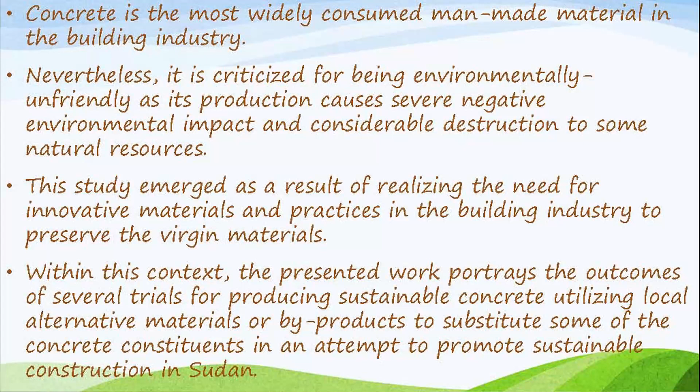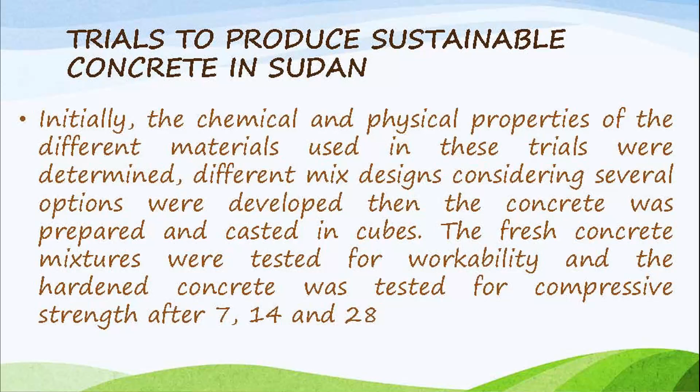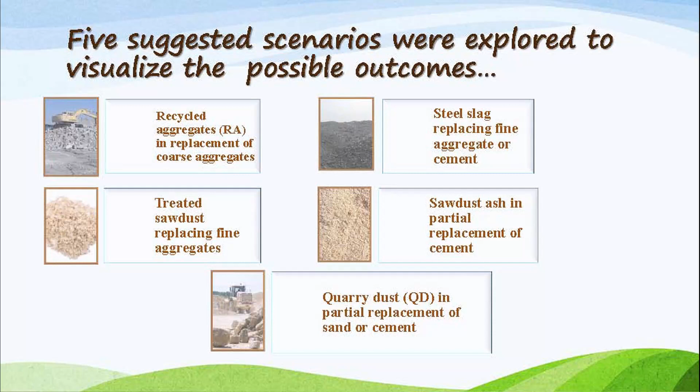In our scientific research, we have a lot of trials - about 9 trials, but now we have results for 5 trials. We need to find how these trials affect the behavior of concrete, like workability, compressive strength, durability - what happens if we add some of this material to concrete, to the workability test, or to the compressive strength test. We have 5 suggested scenarios we explore for possible outcomes. This is from the literature review of materials we found in Sudan - these are the 5 suggested scenarios.

We'll talk about one scenario and the results for each scenario. Scenario number 1 involves 100% recycled aggregate and natural pozzolan as a replacement of the coarse aggregate and cement in the concrete mix. In Sudan, there is a lot of demolition of buildings. In this scenario, we need to find whether adding some of this recycled aggregate and some natural pozzolan from Jabal Marra or wherever can increase compressive strength or increase workability, or decrease it, or whatever.

This is the scenario - the picture shows how we take the recycled aggregate for the trial. In this scenario, we have 8 trials. Each trial has cement, water, fine aggregate, natural aggregate, recycled aggregate, and pozzolan, and we found some results on the properties of the recycled aggregate and natural aggregate.

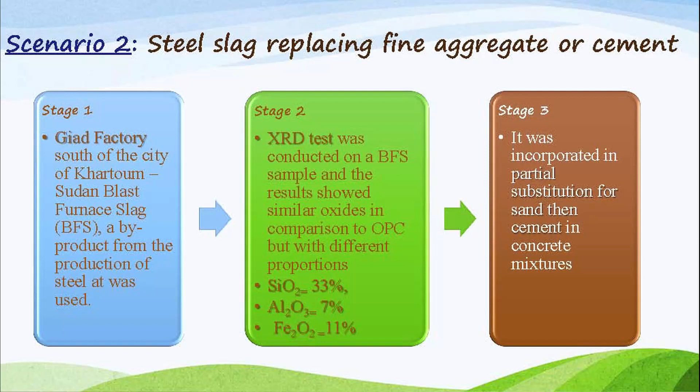Number 3, it was incorporated as partial substitution for sand and cement. A standard mix and other 3 were the slag replaced at 10%, 15%, and 20% of sand weight, and 15%, 25%, and 35% of the cement weight.

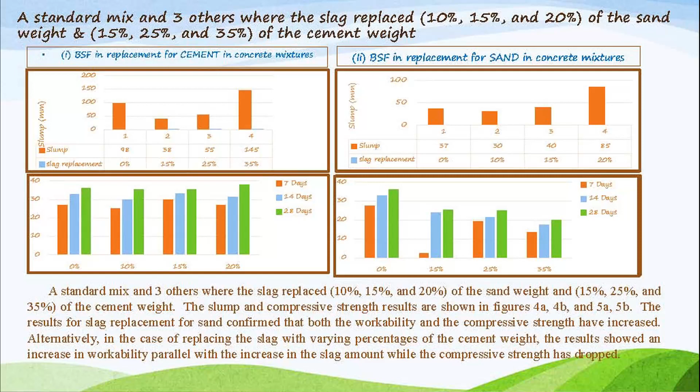Trial number 6, treatment with calcium hydroxide about 10%. And number 7, treatment of the sawdust changed to 20%.

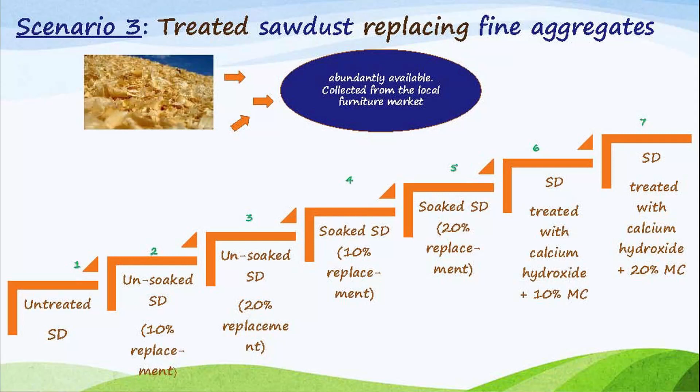The sample of sawdust was from the local furniture market in Khartoum state. Then we collected the treated sawdust and used it in the concrete mix for 7 cases. We conducted the compressive strength test for all 7 trials. We have some positive results for the treatment using sawdust replacement for fine aggregate.

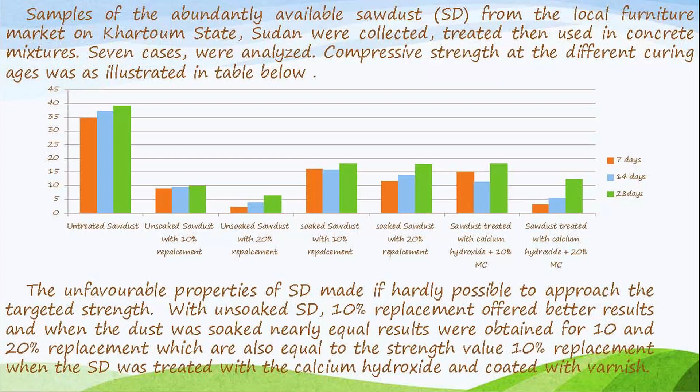Scenario number 4, sawdust as the partial replacement of cement. We collect the raw sawdust, burn some sawdust to ash, perform sieve analysis, and then prepare the sawdust concrete mix.

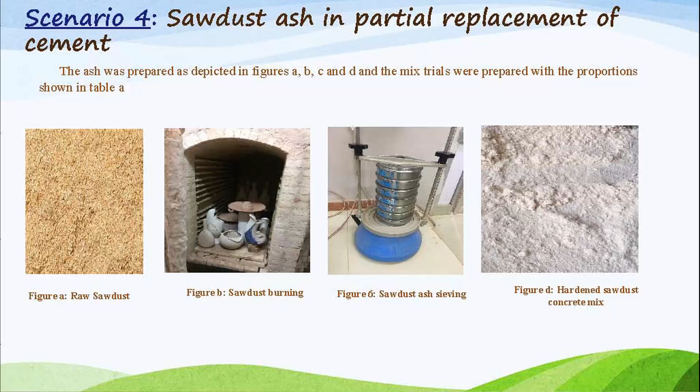This sawdust we use in the concrete. Then we do the compressive strength and slump tests for mix number 1 and mix number 2. If we look at the result, we find the compressive strength decreases for sawdust.

If using sawdust about 10%, then increasing the percentage of sawdust to about 20%, the workability or slump test of samples using sawdust decreases about 20%. Then if we increase the percentage of sawdust used as replacement of cement, the workability also decreases. Better results are achieved when the ash was used as replacement for cement.

Slump values are within the design limit of 30 to 60 millimeter, and compressive strength meets the target value within the 20% replacement ratio.

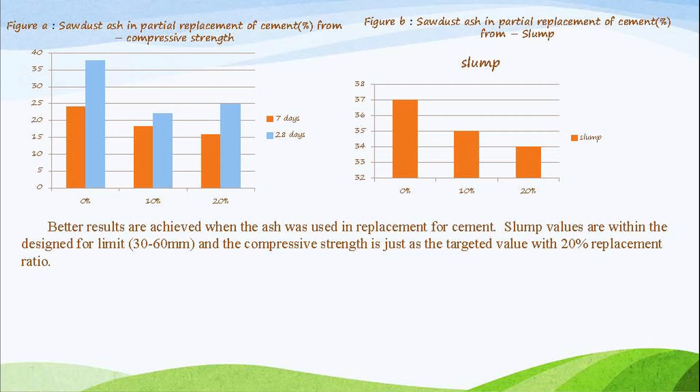Scenario number 5, quarry dust as the partial replacement of sand. Quarry dust is sediment produced from the process of extracting and treating rocks. This is collected from the manufacturing of cement, then used in the concrete mix.

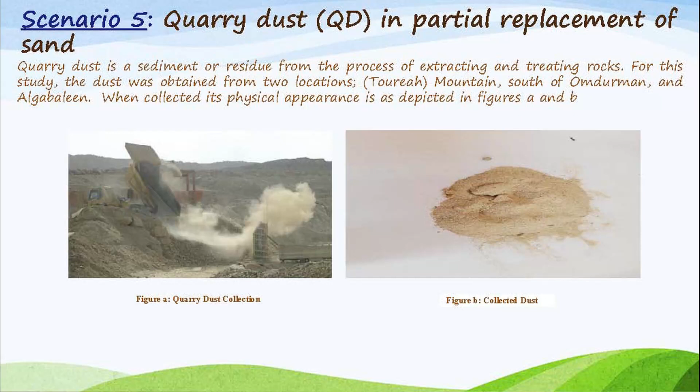Quarry dust from Omdurman, Sudan, and we have 2 locations. We collect the sample of quarry dust from Algabaleen, Sudan. We see the variables of the result for compressive strength.

In replacement for sand, concrete mix containing 15%, 25%, and 35% of QD replacing cement, and 15%, 25%, 50% were designed and prepared. Quarry dust's workability in fresh concrete was measured for all mixes, along with compressive strength.

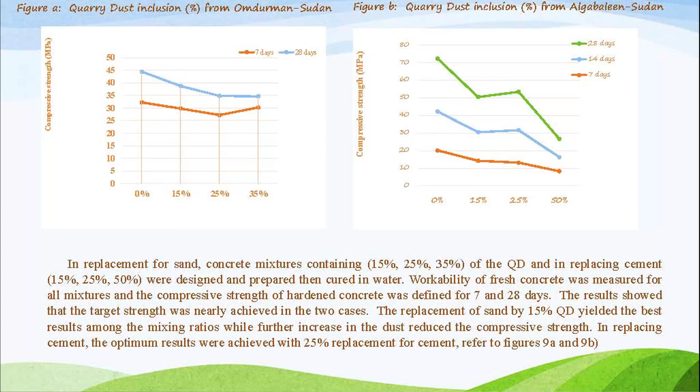The replacement of sand by 15% QD yielded the best result, and for the replacement of cement about 25%. The result confirms the suitability of recycled aggregate for full replacement of natural coarse aggregate.

Steel slag was more appropriate for replacing sand than cement when added in small percentages, not exceeding 15%. Sawdust needs treatment to eliminate its unfavourable properties. The addition of QD replacement of 15% of sand offered reasonable workability, but the compressive strength was only approaching the target value.

According to these results, it could be inferred that the test options offer reasonable evidence to confirm there is potential for producing green concrete for Sudan.

I am told we have more of these trials. We have about 8 trials, but this research focuses on 5 trials. My colleague, Dr. Salma, tomorrow we'll talk about 1 trial on metakaolin in Sudan, or kaolinite in Sudan. This is one of the biggest trials we do in our research.

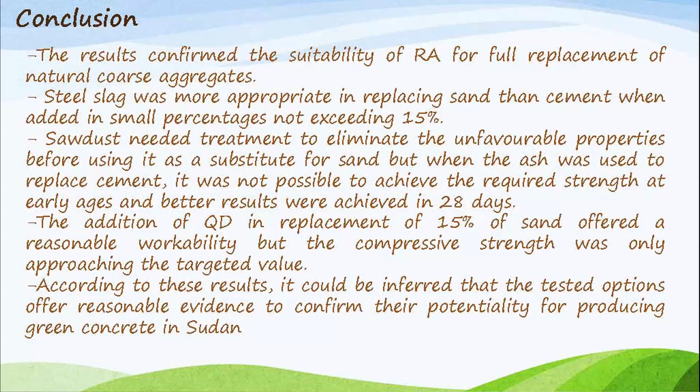We very much appreciate this, and we are grateful, and I can see that you are doing your very best, because we just received a message from Libya, from Professor Nasir, who has been for the last 2 to 3 days trying to find a single hour to fix his presentation. He couldn't, and he said now he can't join us because of electricity. And I think this really is the issue.

We have been discussing this quite seriously across lots of conferences in London and others. Africa's major developmental problem is electricity. This is being acknowledged by many people. When we talk about sustainable development in Africa, all people, myself included, argue that if we can't fix the energy, particularly electricity in Africa... I can tell you a figure, last year, I think I was in Oxford a year ago, and at that time, the electricity produced by Korea is bigger than the entire African continent. When I said that, people were shocked. One country's production of electricity is higher than the entire continent of Africa.

And I think this makes a very nice transition. We will come back to you, Dr. Eltahir, stay with us. I hope you can, whatever electricity you have now, will make you stay a little bit to listen to Dr. Tayseer, and then we'll come back, because she is going to talk about what is being called the leading, or the biggest, or the most complex energy project in Africa. Of course, you know which dam we're talking about now.

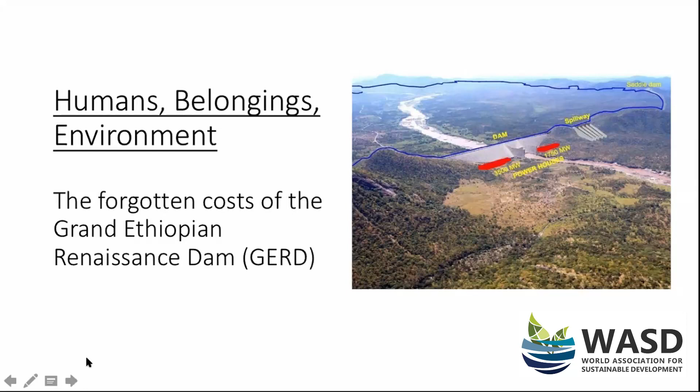Okay, now let's just touch a little bit on what are we talking about when we say safety. First of all, safety is an ongoing process. It starts with the initial stages when any project is an idea. So really, all the safety should have started when it was only just an idea. Point number one, very important to remember.

Now, risks, another basic thing we need to know: what are risks? Risks, we have some acceptable risks and non-acceptable risks. Why do we talk about this? We talk about acceptable and non-acceptable risk because if any project has an unacceptable risk, even if it is 0.0001, okay, it makes it void. We cannot go for it, okay?

So the objectives today, we want to talk about all these safety issues. However, I thought the best thing is we need to really understand a few things before we can all, by the end of this, assess our own opinion or formulate our own opinion, rather than me telling you. I can tell you straight away what's going to happen, but I want you to make your own opinion.

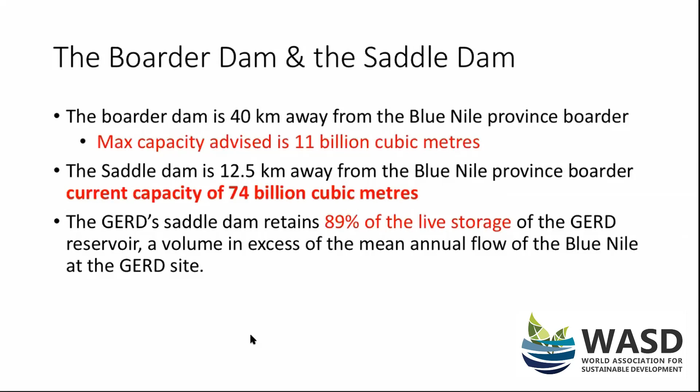So you can see how big is this storage or reservoir of water. In fact, its volume is in excess of the mean annual flow of the Blue Nile itself. So you can really know what the size of the issue is that we're going to talk about.

The Ethiopian, well, the GERD, as we call it, okay? Why is all of this happening? Let's take a look about what is, you know, fear of the unknown. I always say it's about fear of the unknown.

First of all, this GERD is constructed in a mountainous area. Fact. We have limited information collected on key environmental factors. There is lack of information about studies for site, condition, hazards, and any other environmental impacts. There is lack of information about whether the current structure of GERD could actually withstand the 74 billion cubic meters or not. And there is lack of information about the details of the legal aspects that might impact Sudan for generations to come.

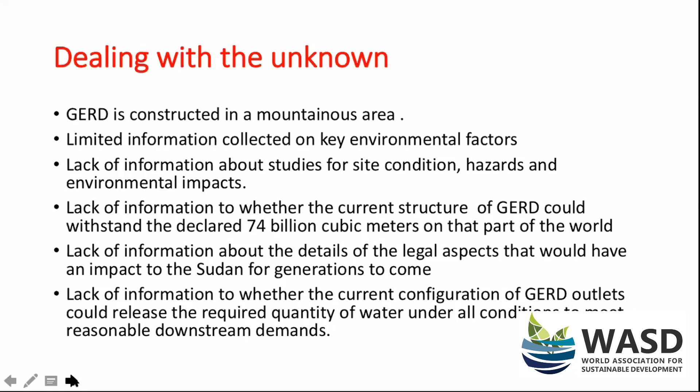There is also a lack of information as to whether the current configuration would actually enable the Sudanese to have water released from that reservoir once we need it. So there are a lot of variables that we actually don't know. I called it dealing with the unknown.

Generally, dams have historically been made because they are the cheapest source of energy, and therefore they have always been with us. However, they can also have a high failure rate.

The reasons for that, in dams in general, not only this one: number one, prolonged periods of rainfall and flooding. Too much rainfall will affect the dam, and this is the main cause of dam failures.

Second, the presence of geological structures, for example faults, joints, folds in the rocks. Our geologist colleagues would understand that better.

Then reservoir silting and sediment accumulation in the dam's reservoir, due to insufficient dam spillways.

Then landslides into reservoirs, which cause surges that result in overtopping of water on top of the reservoir.

Then earthquakes, which typically cause longitudinal cracks at the embankments of the reservoir, and are one of the leading structural failure causes.

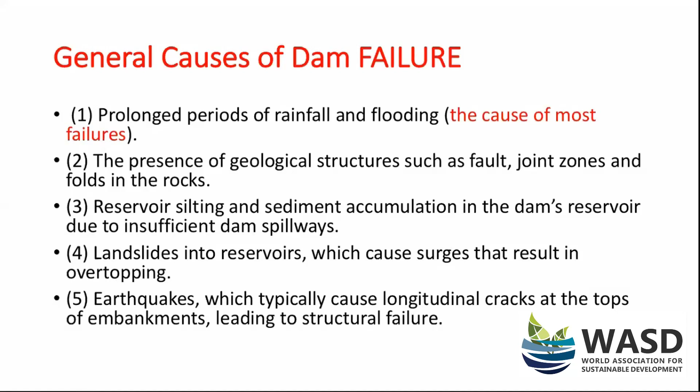If you just get a bucket and put it in the garden and keep filling it with water, eventually you will see it's going to dip. And when it dips, what is it going to do? It depends on what sort of bucket you are using - you need to know how it is going to withstand all that pressure, so on and so forth.

As I said, there are very few studies. We are dealing with the unknown. However, we could only find a few studies.

One of them is called remote sensing techniques, and these have been deployed to map factors that can lead to GERD failure and predict flooded areas in Sudan and seawater intrusion in the Nile Delta in Egypt.

For the sake of this presentation, I'm going to concentrate only on Sudan. The GERD is constructed in a remote area where limited data has been collected on key environmental and social factors. We're lacking information on the geology, the tectonics, ongoing maintenance of the dam structure itself, safety inspections, continued safe services, and a full environmental impact assessment.

Till now, Sudan as a country does not have any of those studies. This is one of our problems.

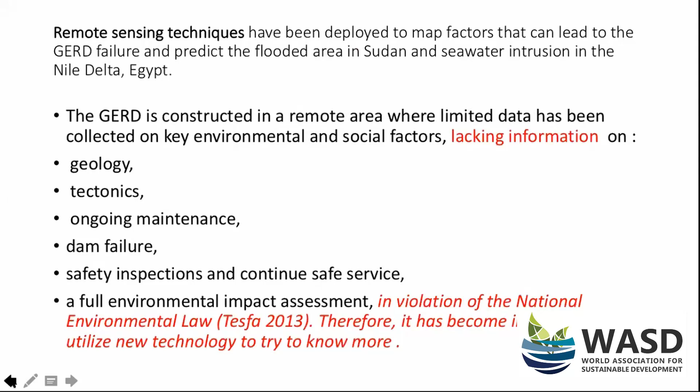Now let's look at the geography and hydrological setting of the GERD. According to a study done mainly using satellites - there is no actual physical study - this dam is located on the northwestern side of the Benishangul-Gumuz region, which is characterized by high rainfall between May and October.

And what did we say earlier? One of the causes of dam failures is high rainfall. The estimated annual rainfall is approximately 860 millimeters at the dam site and 2,250 millimeters in the adjoining mountainous areas. The volume of rainwater is a weather erosion agent, which affects the fill slopes, leading to gully erosion and landslides.

So can you imagine with me what we are going through? So much rainfall, so much water going there, and the nature of the land itself - the mountains, the slides, the slopes.

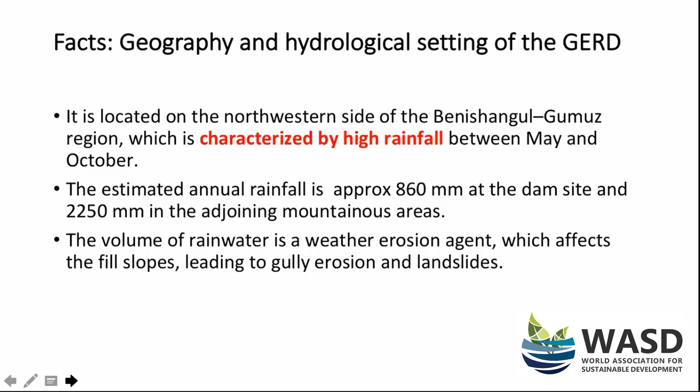Now a little bit about the further geology. This GERD not only sits on metamorphous rock, it is also between two hills.

The right hill is 1,400 meters above sea level, mainly composed of intrusive acidic rocks, and the left hillside is 1,100 meters, composed of metamorphic rocks such as chlorite slate.

The intrusive acidic rocks and the metamorphic rocks kind of oppose each other - some are harder, some are less hard - so there is tension between these two mountains, and this dam is actually in the middle, between these two kinds of rocks.

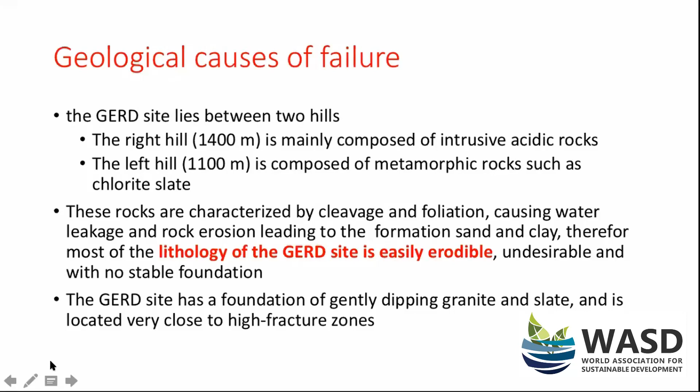So these rocks are characterized by, as a result of this pull and push, cleavage and foliation, causing water leakage and rock erosion, leading to the formation of sand and clay. Therefore, most of the lithology of the GERD site is easily erodible, undesirable, and with no stable foundation. So we are dealing with a massive construction with a very unstable base, literally.

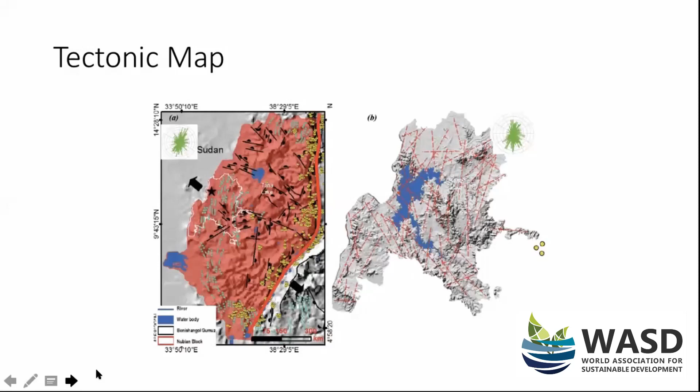Now, this is a map of the tectonic setting. I'm not going to go into details, but in summary, these are the layers of the earth that would move somehow, and we can see the direction of the movements towards our beloved country. These are all not far from the GERD—some 700 kilometers, some 350 kilometers away from the site.

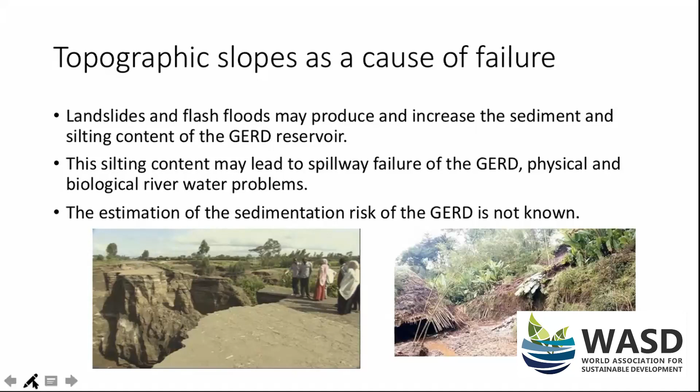Now, the estimation of the sedimentation risk of the GERD is not known. So really, we are in the dark—we don't know all about this.

It may also take the GERD itself and everything in its path, leading down to Khartoum, beyond Khartoum, and all the way down to Egypt. Okay, let's speak a little about the rainfall and meteorological factors that could contribute to dam failure.

An extreme rainfall event—let's say more than 2,500 millimeters over a few days—will definitely cause increased stream flows, resulting in the water level in the reservoir reaching as high as 175 meters, which topples the reservoir itself. Unpredictable downstream flooding hazards may also exist in different areas, even in Khartoum, due to failure of some sort, causing more flooding and more consequences.

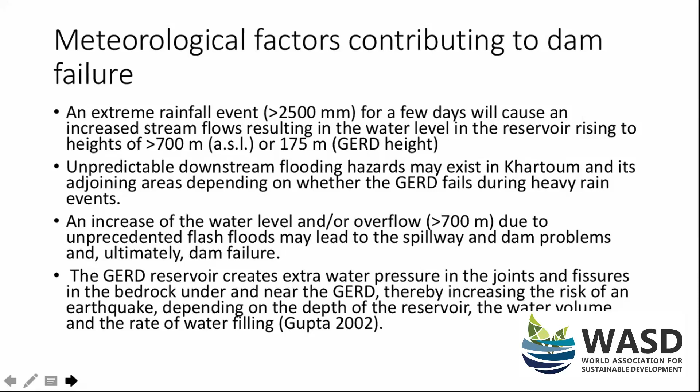So these earthquakes, they might not be as massive as we can imagine, but they are strong enough to cause cracks in these constructions and man-made structures.

Now globally, dam failures do happen. Several dams all over the world, especially in India, have been destroyed owing to unprecedented flash floods, causing massive debris accumulation and problems in the dam spillways. 35% of dam failures were the result of floods exceeding the capacity of the spillways, and 25% were the result of design and foundation problems, such as landslides, earthquakes, and excess pore pressure.

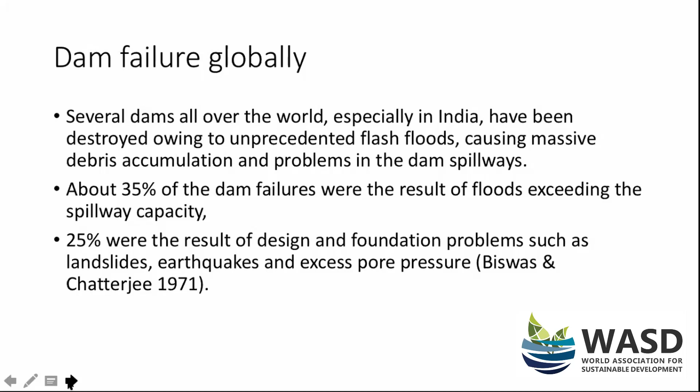In terms of environmental impact, the dam will reduce the amount of suspended sediment or silt and increase the evaporation rate, salinity, and pollution of the water. The deterioration of water quality will in return affect all the environment around - the birds, the mammals, our cattle, our fish, you name it.

Farming along the Nile banks depends on flood irrigation, as we all know. This will be lost, leading to famine, desertification, and consequences even to the nature of the crops we grow. For instance, in the Blue Nile province, one of the main things that Gadarif and Sennar and all these places grow is sesame. It needs a period of rain and a period of dryness. If this is affected, if the rain has extended like last year, then we will lose our productivity in important crops like sesame, so on and so forth.

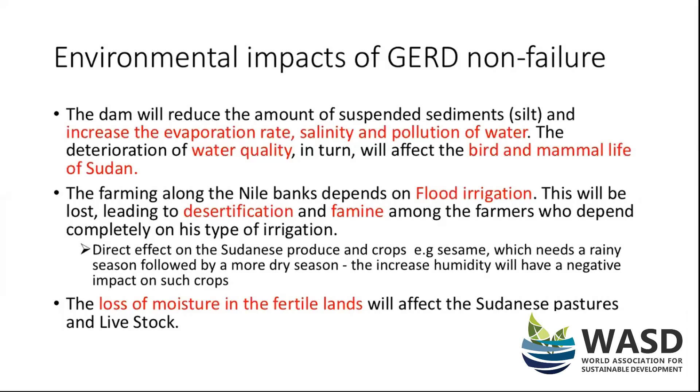The dryness of the lands can happen with the GERD, because we are not in control of how much water is coming to us. The dryness will lead to loss of moisture in our fertile lands, and this will affect our livestock, which we depend a lot on.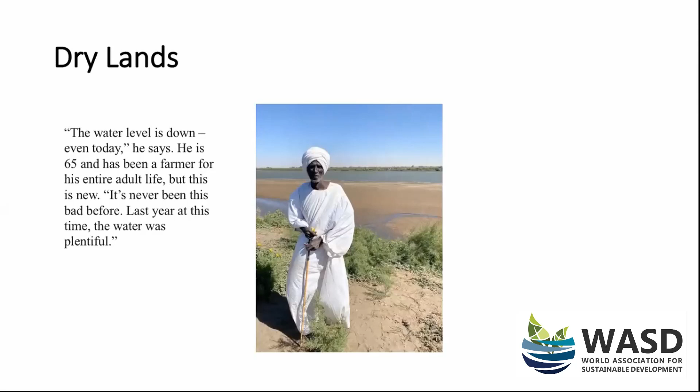This is a picture of one of our fellow Sudanese. People are already starting to feel the drought, and here he said that the water level is down even today. He says he's 65 years old, he's been a farmer all his life, and it has never been like this before.

Now, again, going over very quickly over the dam failure. There is always a risk posed by the GERD's extensive saddle dam, and this may not have been fully appreciated or analyzed, we don't know. The design, construction, safety measures, and maintenance of the saddle dam need to be rigorously scrutinized by all 3 countries. Then a detailed plan is needed to carefully and continuously monitor the safety of the structure and repair any problems as they arise.

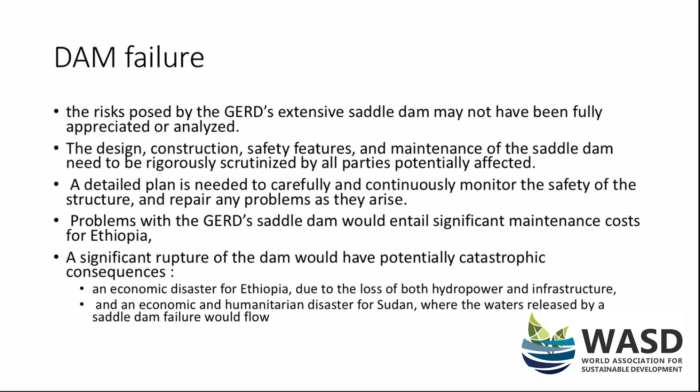Problems with the GERD saddle dam would entail significant maintenance costs for Ethiopia. Is Ethiopia going to pay? Can they afford it or not? A significant rupture of the dam would have potentially catastrophic consequences on Ethiopia itself, because of the hydropower and infrastructure they are looking forward to. But to us, we have catastrophes - economic and humanitarian disasters - when the water gets released by the saddle dam failure.

Consequently, the GERD will flood about 1,700 square kilometers of forest, approximately 811 kilometers from Addis Ababa, but only 12.5 kilometers from the Blue Nile Sudan border, creating a dam reservoir that will hold up to the declared 74 billion cubic meters, as we explained, and the undeclared figure is 90. Failure of the dam would wipe away the Nile Sudan strip.

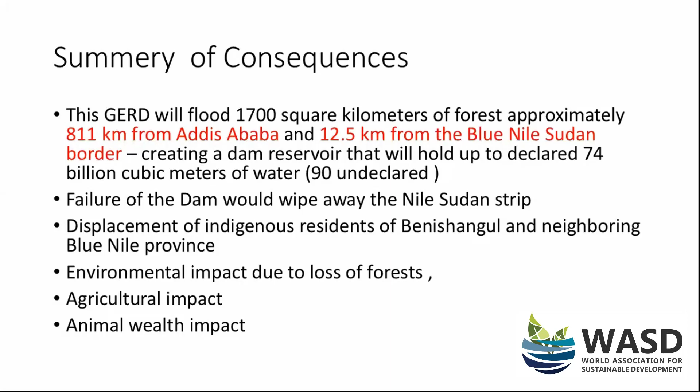Displacement of indigenous residents of Benishangul and neighboring Blue Nile province, environmental impacts due to loss of forest, agricultural impact, and livestock.

This is just a glimpse of the population that's likely going to be affected. I know that everyone has been stressed by the coronavirus. Just for comparison, everyone globally is concerned because the coronavirus is going to kill 2.4% of the people of any population.

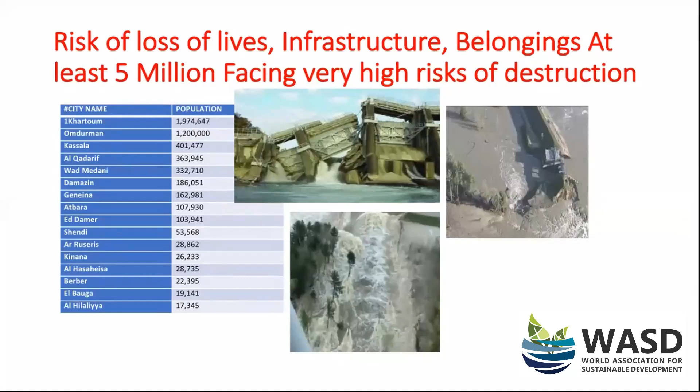Well, let me break this news for you. The GERD has the high risk of possibly killing about 5 million Sudanese, and this is 12%. So you can imagine, from the risk point of view, what are we talking about? What are we thinking about? All of Sudan, all the Nile areas, will be completely destroyed.

Now, again, our agriculture will also be affected horrendously because we are going to lose big plots of agriculture. We are going to have dryness. We will need to change our strategy, and we need to move to irrigating agriculture. The change will affect 1 million hectares and will require the construction of costly canals and drainage networks, and will cost billions of dollars, which Sudan's economy is unlikely to afford. So we really need to get thinking.

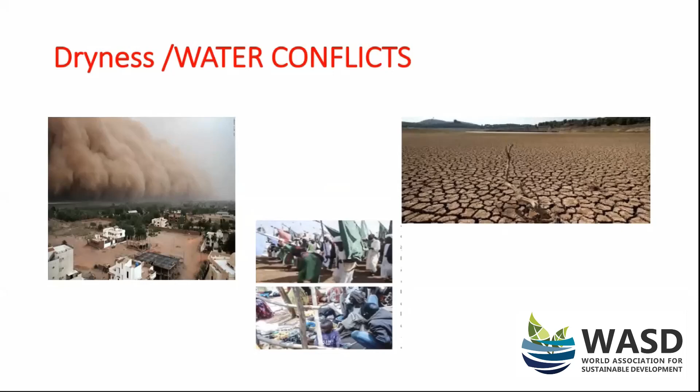Just a few pictures from the dryness and the effects we would be looking into, from the displacement of people to the dryness, to the changing climate that could be associated with it. Now, one of the most important things we cannot disregard is the seeds of conflict that are happening.

Seeds of conflict are also considered within the safety and health of individuals, because conflicts are a problem that will affect lives and many generations to come. First, there is always this question: is this dam legal? There was no prior notification, and this prior notification is something internationally agreed upon, that if any country is going to make anything, they should provide what we call prior notification. This is an international obligation. Well, till now we don't have this.

Another thing, the lack of a power trade agreement may affect the quantity of water that can be released from the GERD reservoir to downstream neighbors. Why do we need these agreements? Because if Ethiopia decides they want more electricity, they might release some water. But there could come a time when they say, no, we're not generating this time. So if they're not generating, we're not getting any. If we don't have these agreements, this becomes a seed of conflict.

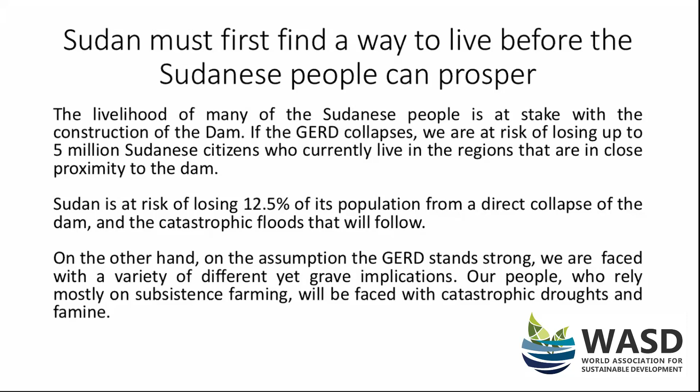And on this note, I leave you and open the floor for any questions. I'm sorry for being long.